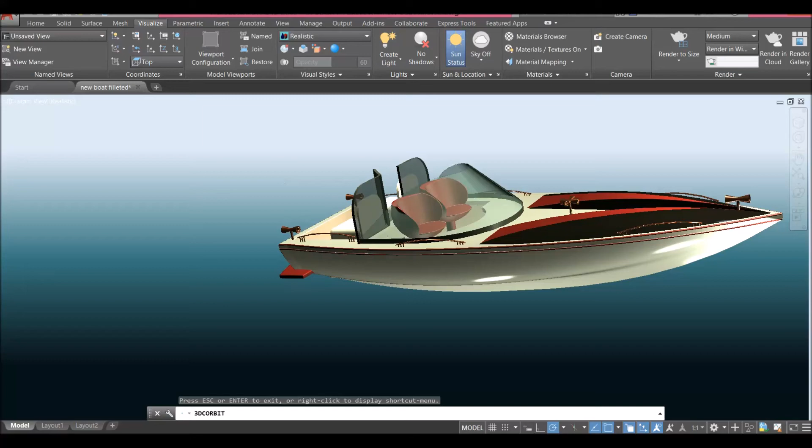I'm going to create a new drawing. Click this drop down arrow, select new. Since I'm using inches, I'm going to use acad3D for imperial units. Click that and click open.

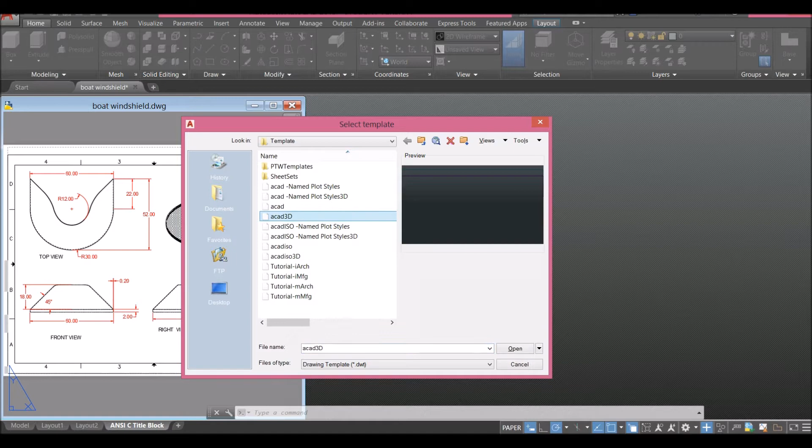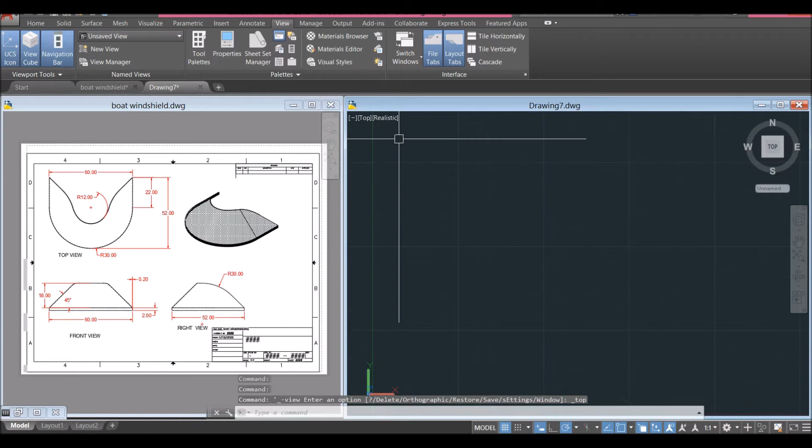I'm going to arrange my window. Click view, tile vertically, click this window again, tile vertically to move it to the other side. I'll adjust my screens and make sure to work on parallel projection by clicking this drop down arrow and selecting parallel. Bring your drawing to top view since I'm going to start working from top view. So this is my top view here.

I'm going to start with circle. Type C for circle command, right click to enter. Click anywhere on the screen and enter 30 for radius. I'll just move it somewhere here.

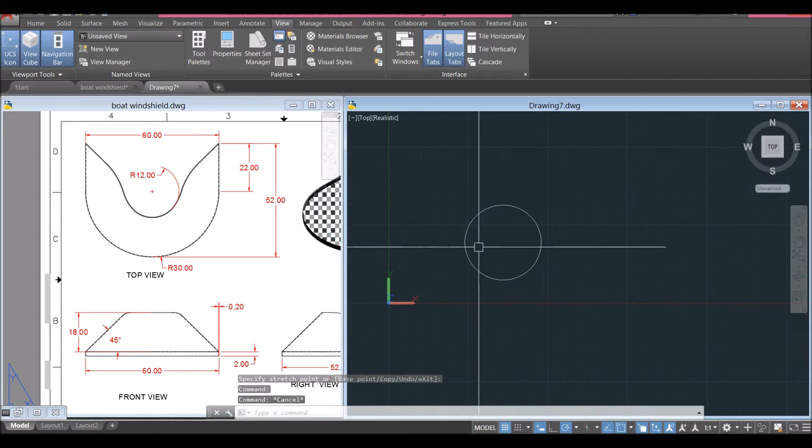Now as you can see, the height from the quadrant of the circle up to this endpoint here is 52 inches. So what I'm going to do is draw a line for guide from quadrant. Move your cursor upward for 52 inches, then move to your right. Click anywhere here as long as it's straight.

Now I'm going to trim, so TR for trim command, enter twice. Oh, not yet - line again from quadrant and just hit that intersection or perpendicular point. Now trim, so TR for trim command, enter twice. Cut that, remove this one and remove this one.

Now join the segment, so J for join command. Click this line and this curve and this line.

Now mirror, so MI for mirror command. Mirror this object, right click to enter. Specify first point of mirror line. Click this endpoint to endpoint and select no.

I'm going to delete that. Now I'm going to join the whole thing, so J for join command. Right click and just window the whole thing. Now this is one object.

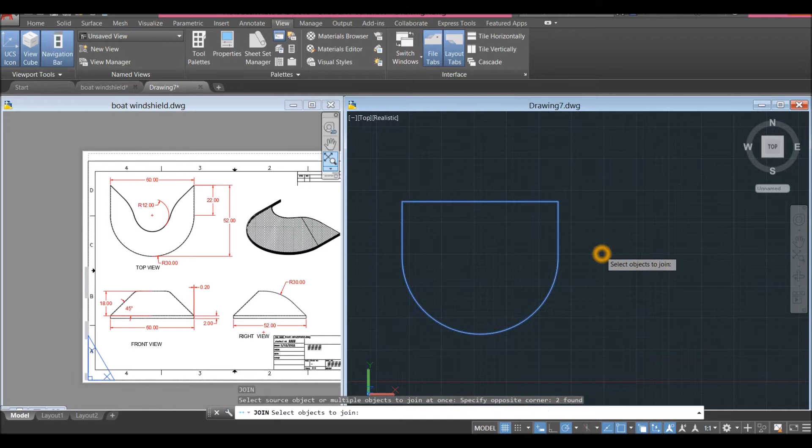I'm going to bring my object to southwest isometric. Before we proceed, go down to the status bar and make sure your dynamic input is on, along with polar tracking, object snap tracking, object snap, selection cycling, and maybe dynamic UCS.

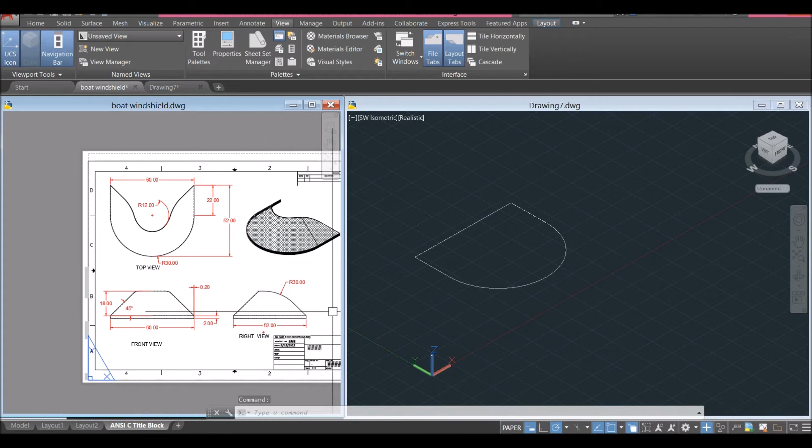Now I'm going to extrude this object. The extrusion height is 18 units, which is this one here, and the angle is 45 degrees.

So to extrude this one, go to home and inside the modeling panel, select extrude command. Click the object, enter.

Move your cursor upward, right click and select taper angle, or you can go down to the command line and select taper angle here. Be mindful of the command line - it's asking specify angle of taper for extrusion, and we're going to enter 45. Then again it's asking specify height of extrusion, and the value is 18.

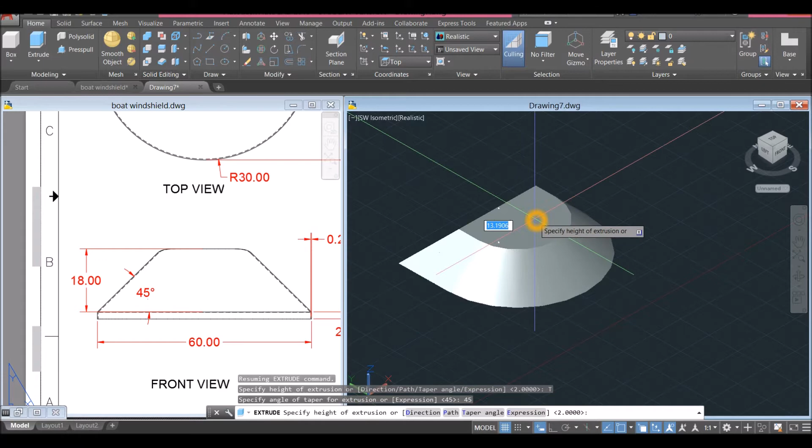Now I have to apply fillet first, and the radius is 30 as shown here.

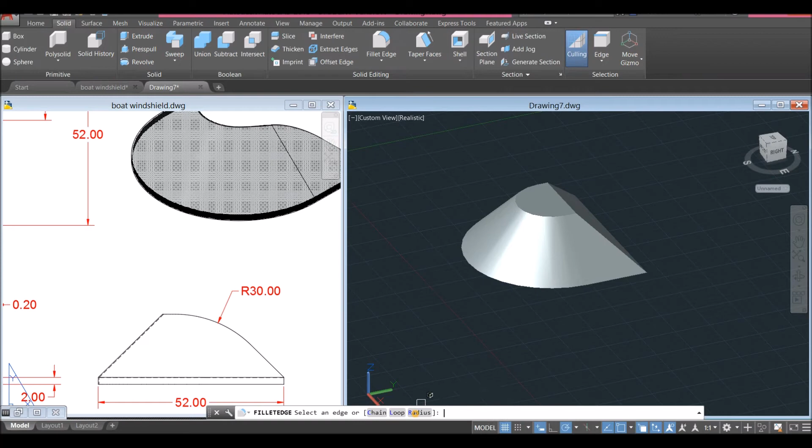Inside the solid editing panel, select Fillet Edge. Go down to command line, click radius option, and enter 30, and click this edge here. Enter and enter again to accept.

So if you view this drawing from the right side view, this is what you see.

Alright, now I'm going to apply shell. Select the object you want to shell. Press the shift key and the wheel of your mouse to turn your object around and select this face to be excluded or to be open, this one. Be extra careful because only the gray areas will be open, and this one too. Make sure the rest are blue.

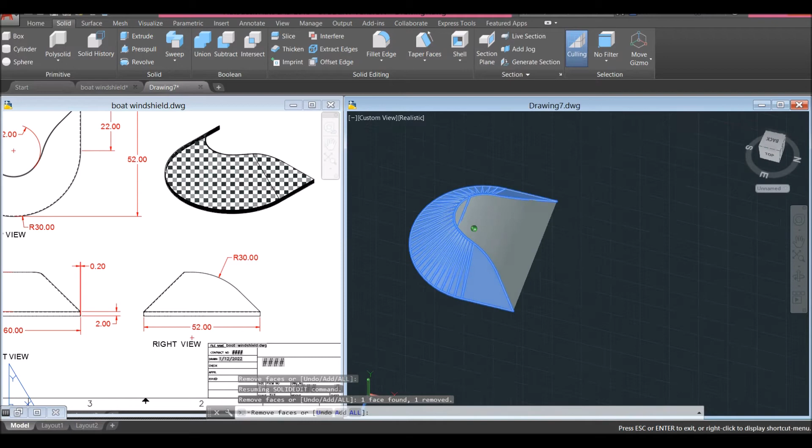Enter the shell offset distance, which is 0.2, which is also the thickness. Enter again. I'm just going to turn off my grid.

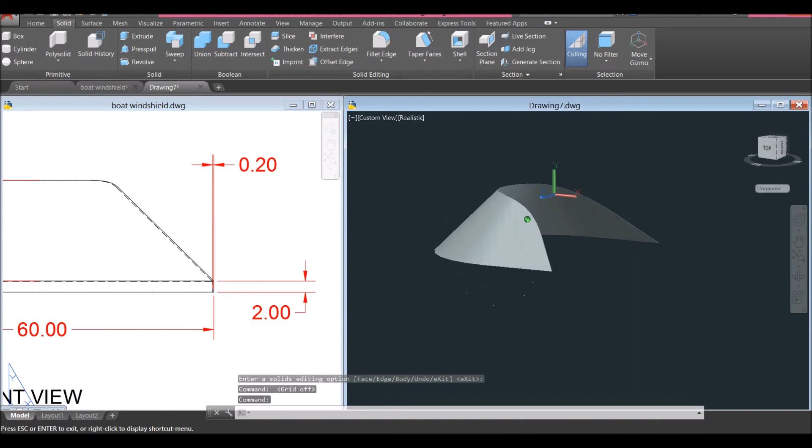And then for the metal that holds the base of this windshield, the thickness or the height is 2 inches.

So I'm just going to use the press pull command inside the solid panel. Select press pull and just hover over this portion here, this face. Left click, let go, don't hold or press any button, and just move your cursor downward, or pull your mouse downward and enter 2 units.

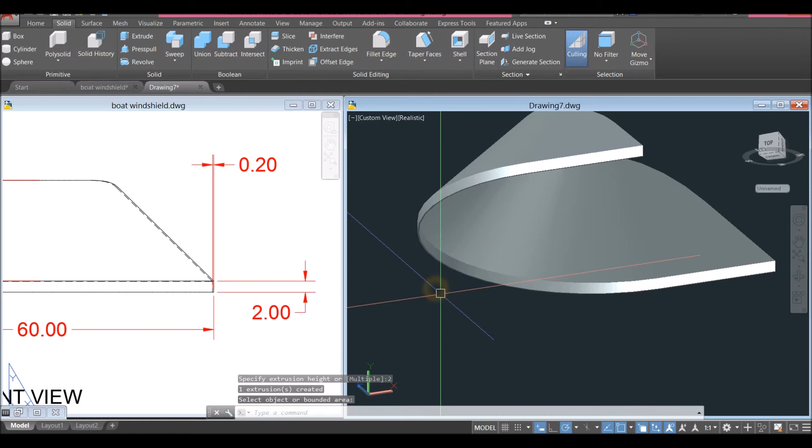And enter. Now I'm going to separate this one. So this is metal, just bring this to front view or right view.

Now slice this object. Inside the solid editing panel, select slice, select the object you want to slice, and start from this point. Click this one here, move your cursor to the left and make sure it's straight - you can tell because of that green dashed line.

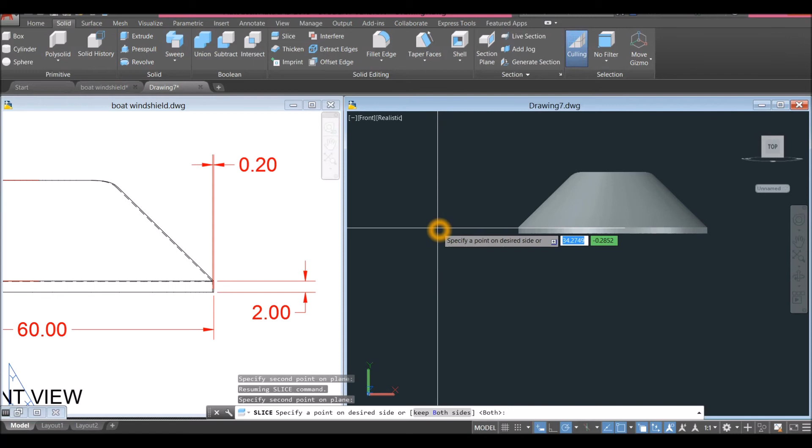Click anywhere here and specify a point on desired side. Again, check the command line, specify a point on desired side. Click this keep both sides option, and now we have separated this base and this one here.

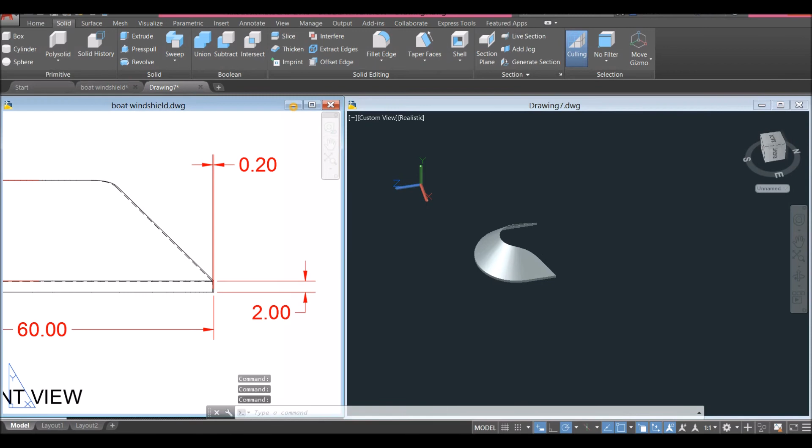Alright, now I'm going to minimize this one, maximize this one so I could apply materials. Type MA, you have choices here, select materials, and I'm going to select foil gold. Click that arrow.

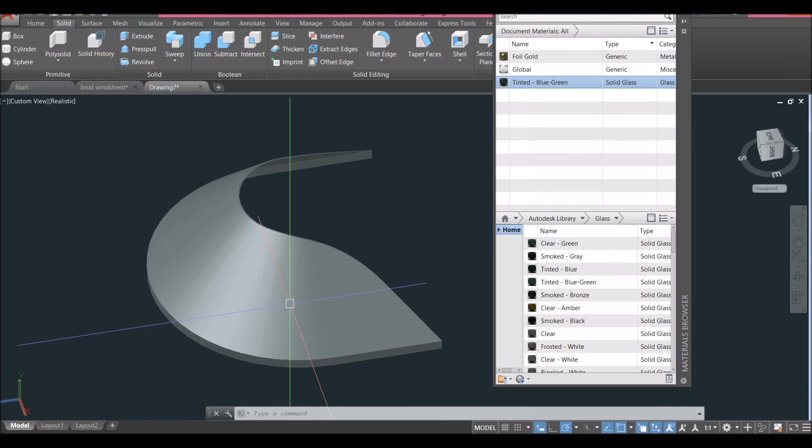And then for the glass, click this arrow by the Autodesk library and select glass. I'm going to use tinted blue green, click that arrow. So select the glass, click this one here, select the metal, select this one here, and I'm going to adjust.

So go to visualize and click this drop down arrow and adjust exposure setting.

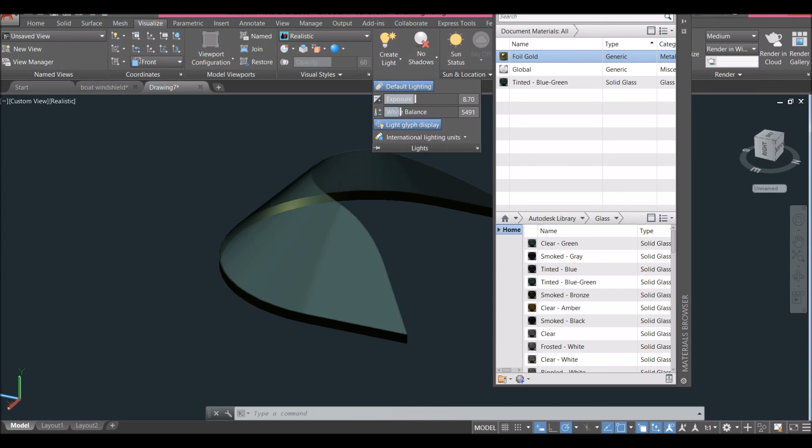And maybe this one, the foil gold, click this pen icon to change the color. I'm going to change the color here to greenish, this one maybe, and darker. And close. Close this one, and I think I'm done.